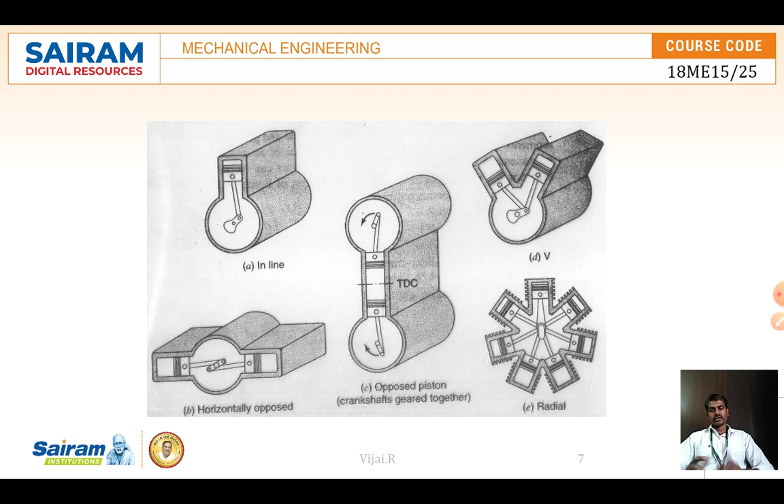And the radial type of engine. Radial in the sense of circumference: cylinders are arranged in a circumference. In the last image on the right side you can see cylinders arranged in circle form, in a circumference, so that all cylinders can be operated by the rotation of the crankshaft and the piston movements can be done. This is called

a radial engine. And a V engine has two inline engines set at an equal angle. So these are called inline engine, V type engine, and opposed engine, where cylinders are arranged in opposite direction to each other. So once again we will go through this.

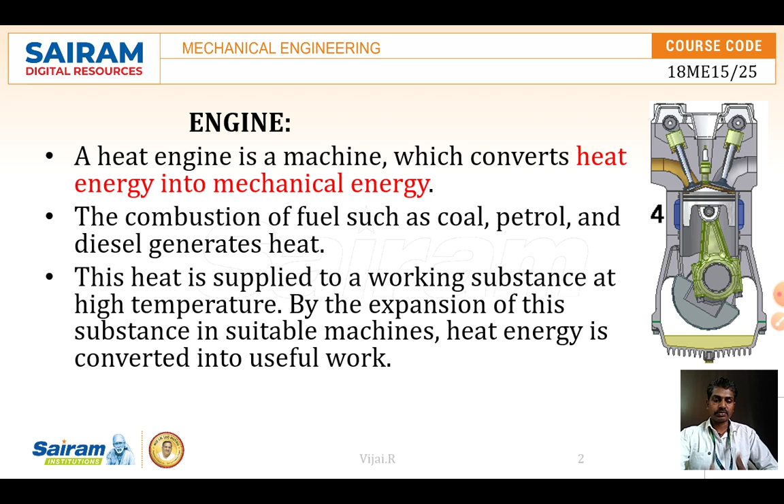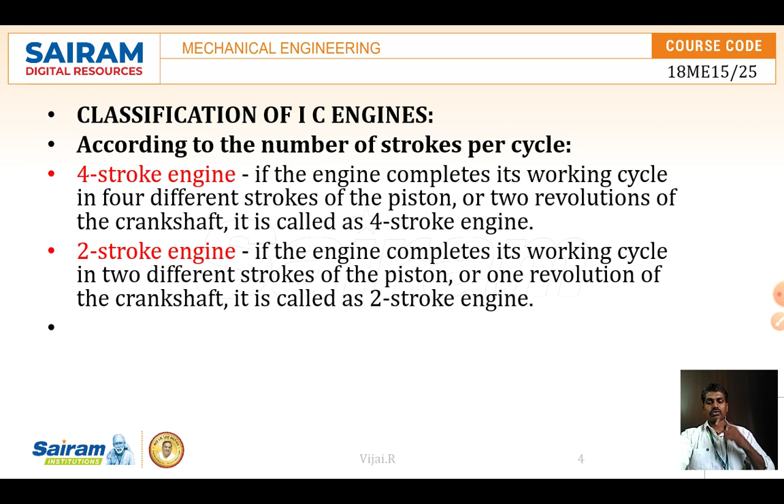So first, classification according to fuel. What types of fuel can we use? Petrol, diesel, gas. So classification according to fuel used is petrol engine, diesel engine, gaseous engine, and biofuel engine. And according to the number of strokes per cycle, 4-stroke engine and 2-stroke engine. A 4-stroke engine has 4 different strokes of the piston, or 2 revolutions of the crankshaft. Within 2 revolutions of the crankshaft, the piston moves 4 times. So this is called a 4-stroke engine. In a 2-stroke engine, only 1 revolution of the crankshaft takes place, and the piston moves only 2 strokes, upward and downward. So we call it a 2-stroke engine.

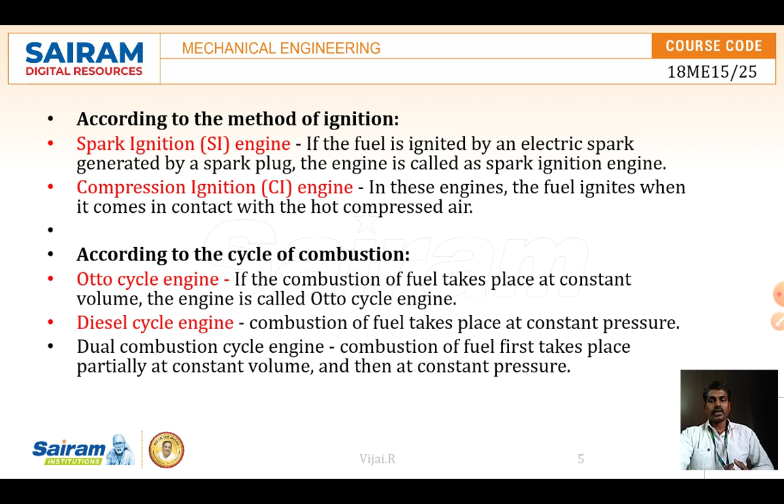And according to the method of ignition, the petrol engine normally uses a spark plug. We call it an SI engine or spark ignition engine. The diesel engine compresses and then burns, so it is a compression ignition engine, where there is no spark plug present. Then we go to classification according to cycle of combustion. It may be the Otto cycle or the diesel cycle. We will explain how the Otto cycle and diesel cycle work in further videos.

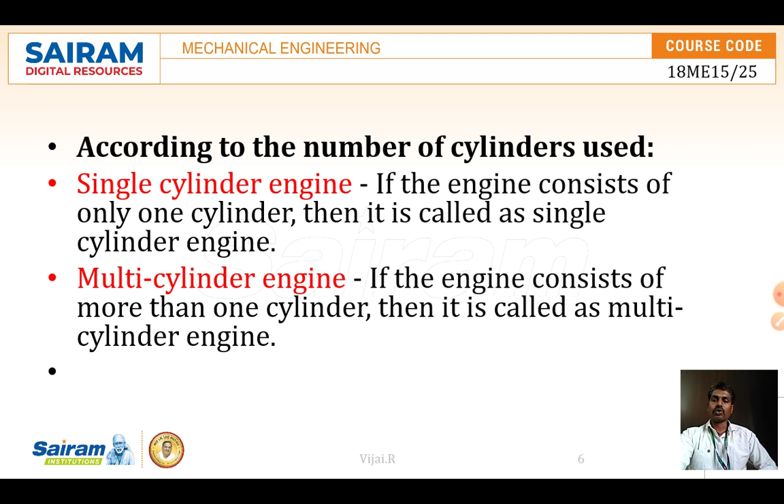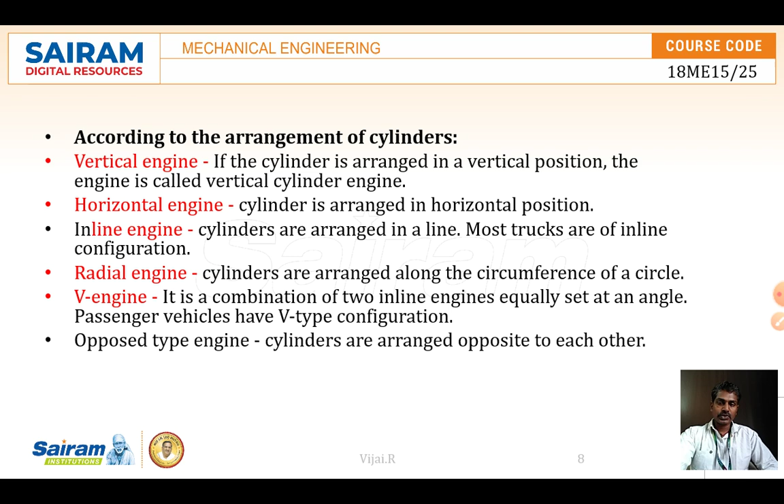And by number of cylinders, it may be a single cylinder engine or multiple cylinder engine. And how the cylinders are arranged is called the arrangement of cylinders. Classification according to arrangement of cylinders: it may be a vertical engine, horizontal engine, V type engine, radial type engine, opposed type engine, like this. So this is what an engine is. A heat engine is the one which produces rotary motion or mechanical motion with the help of heat. So we have also seen the classification here, right?

There is also classification according to cooling. Normally on a two-wheeler, fins will be there. You might have seen those fins. They are air cooled engines. And bikes, cars, trucks, and lorries also use water cooled engines. Water is circulated around the engine, and the water takes the heat, because the engine produces a lot of heat when the fuel is burning inside.

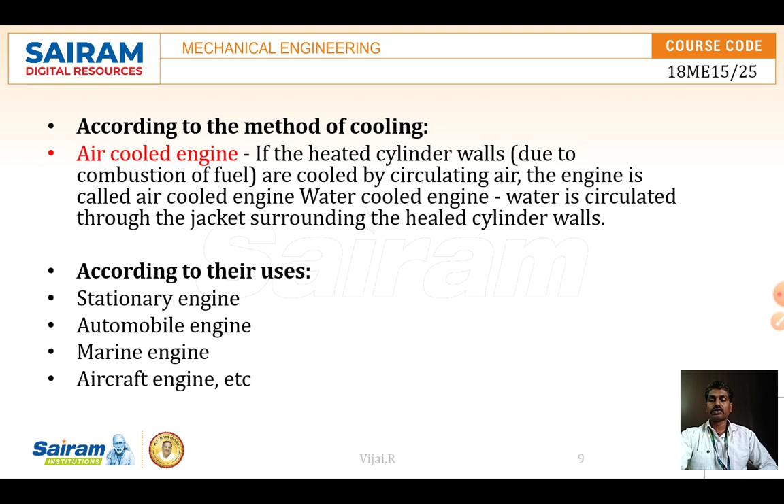And according to use, we can say stationary engine, automobile engine, marine engine, and aircraft engine. So it depends upon the application of the engine, right? In the next classes we will further see what 2-stroke and 4-stroke engines are and how they work, right?